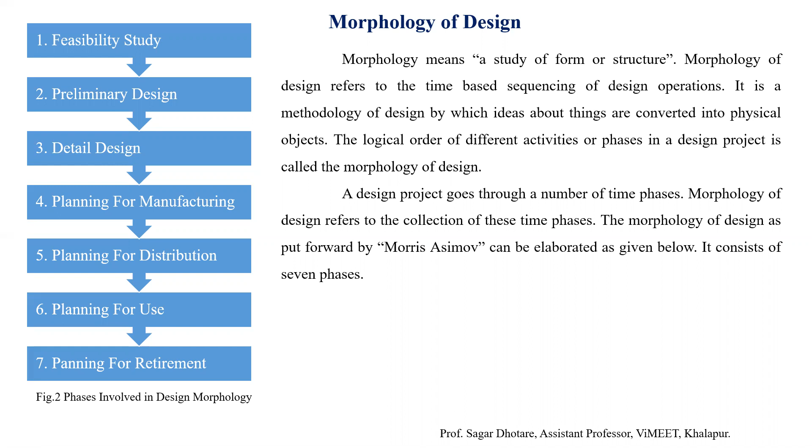We will elaborate one by one. First, feasibility study. This is a stage where whatever the design concept we are using should be judged for feasibility, or whatever concept or innovative idea we carry out, it should have a different solution.

We have to find out the various aspects of that product, then narrow down to the basic concept. In feasibility study there is a requirement of great creativity and innovation, and there are few uncertainties available as well.

We also consider this product or project from a business point of view. These are the various aspects. We also have to find out the evidences, so that it confirms whatever idea we are using is very solid and needs to go forward.

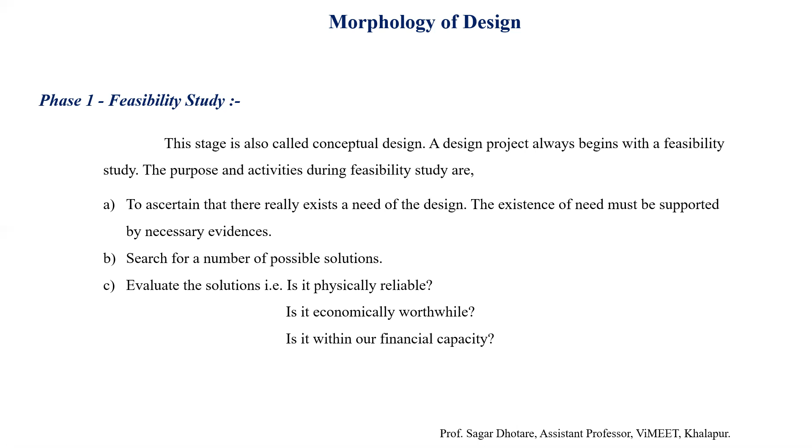Next, preliminary design. This is the stage at which the concept generated in the feasibility study is carefully developed. The structure of the design concept is developed in the engineering design phase. It is the place where flesh is placed on the skeleton of the design concept.

The embodiment of all main functions that must be performed by the product must be undertaken—we have to take down the list. It is in this design phase that things like strength, material selection, size, shape, and any special information are decided and noted, along with aesthetic looks.

Some important activities that must be done at this stage are model building and testing, studying the advantages and disadvantages of different solutions, and checking the performance, quality, strength, aesthetic looks, etc., so that the product could be ready in the preliminary stage, or embodiment stage, of design.

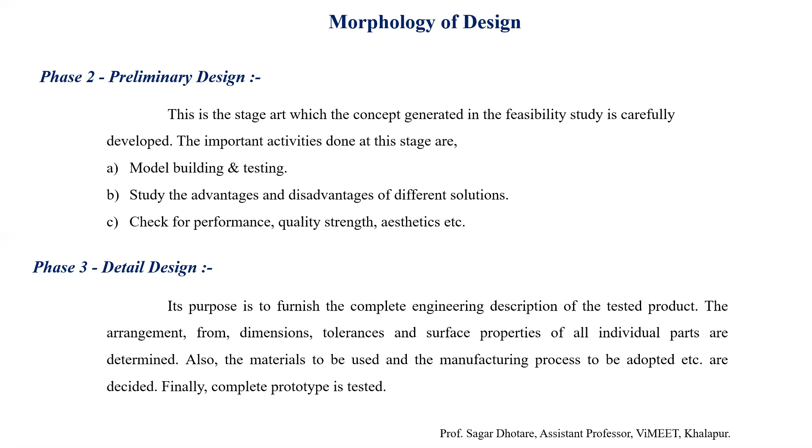Next, phase number 4. This includes all the production planning and control activities which are necessary for manufacturing of the product. So we can say stage 4 names itself planning for manufacturing. It gives the idea of what we are actually doing in this stage.

So detailed planning must be done to provide the production department so they can manufacture the component, product or part very easily. A method of manufacturing must be established for each component in the system. As usual, the first step is the process sheet is created for manufacturing any component. It contains the sequential list of manufacturing operations that must be performed on the component or any components.

Then second stage, we have to specify the condition of raw material. So raw material could be a steel bar or any bars, any kind of sheets, or any casting. So this raw material condition we have to identify or specify.

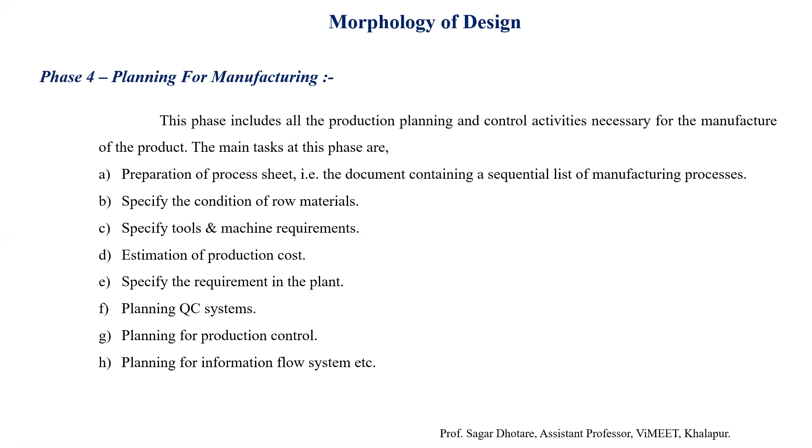Next, phase number 5: planning for distribution. This is again very important. If you plan properly and manufacture the product as per the given design, everything is done, but the economical success of any design depends on the skill exercised in marketing.

In this phase, for planning an effective distribution system, important technical and business decisions must be taken to provide effective distribution to the consumer of the product that has been produced. So we have to plan distribution with respect to technical and business considerations. In the strict realm of design, the shipping package may be critical.

The concept is such that the shelf life of the product may also be critical, and this needs to be addressed in the earlier stages of the design process, as I discussed before. Also, if any problem occurs with respect to the end customer, that should be tackled during testing and all processes, and converted or modified in the design itself, so that the end customer will be happy.

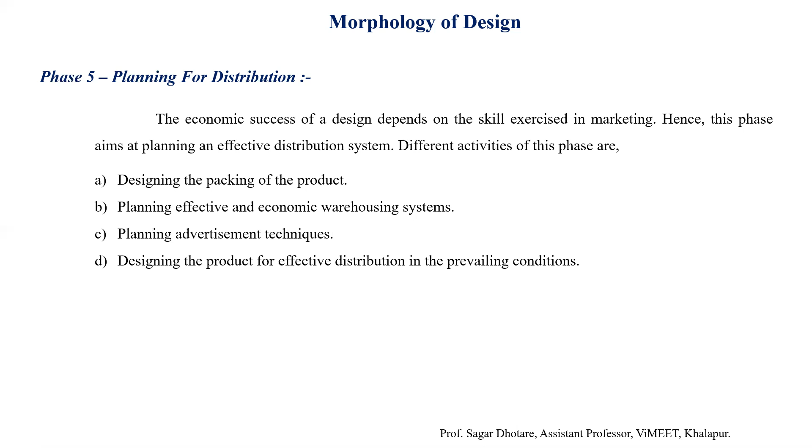Next, phase 6: planning for consumption or use. The purpose of this phase is to incorporate all necessary user-oriented features in the design. The use of the product by the consumer is all-important, and we must consider how the customer will react to the product at all steps of the design process.

The following specific topics can be identified as important user-oriented concerns in the design process: ease of maintenance, durability, reliability, product safety, convenience in use (the human factors we consider in engineering), aesthetic looks, and economy of operation.

Consumer-oriented issues must be considered in the design process itself at the very beginning. They must go through a thoughtful process at the beginning stage only, because afterward it is very difficult to cover up all these things.

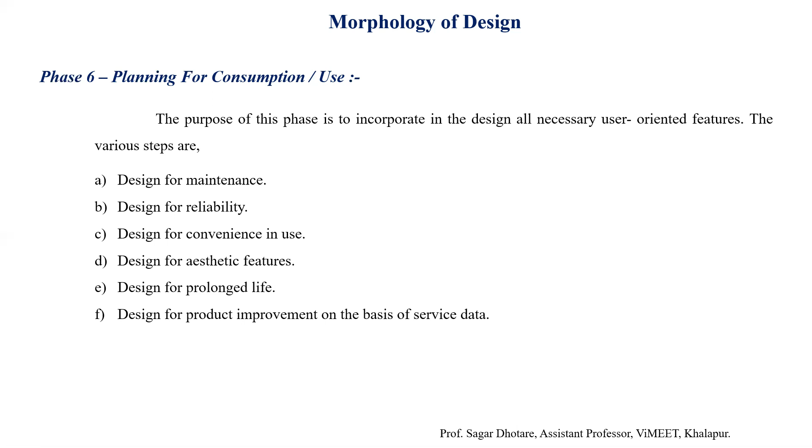The last stage is planning for retirement. This phase takes into account when the product has reached the end of its useful life. The final step in the design process is the disposal of the product. The useful life may be determined by actual deterioration and wear to the point where the design can no longer function, or it may be determined by technical obsolescence in which a competing design performs the product's functions either better or cheaper.

In consumer products, retirement may come about due to various changes in fashion or taste. So we always have to modify the design aspect, finding upgraded versions so that the customer's taste does not change away from the product.

The basic stages we perform in this phase are: design of several levels of use, design to reduce the rate of obsolescence, and examining service-terminated products to obtain useful information.

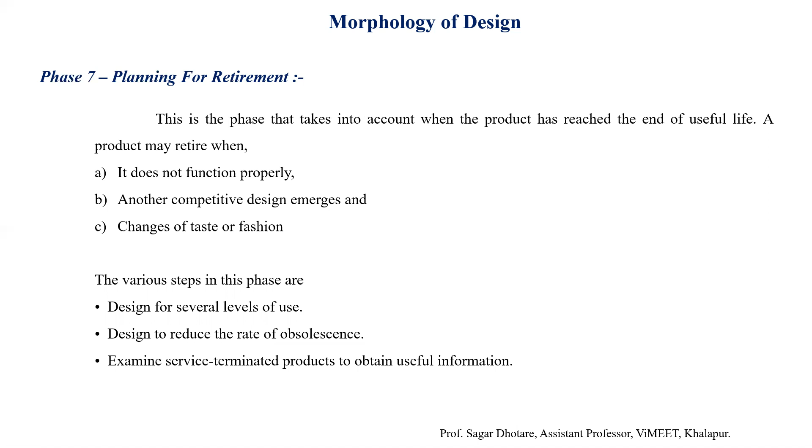Now the next design type is optimum design. In optimum design, there are a few design parameters which we have to classify. The first one is the functional parameter - these are the conditions imposed by the end application on the component, the requirements which must be fulfilled to perform the function of that component.

Generally, the function requirement parameters are independent of the material and geometry parameters.

Second one, material parameters. The material parameters describe the material values like density, modulus of elasticity, modulus of rigidity, yield strength, ultimate tensile strength, cost per kg, etc.

Third design parameter is the geometrical parameter. These are parameters which define the limit of the geometry of a mechanical component, such as module of gear, length of belt, face width, etc. It can define particular dimensions, basic tolerances, and so on. So these are a few design parameters considered in an optimum design.

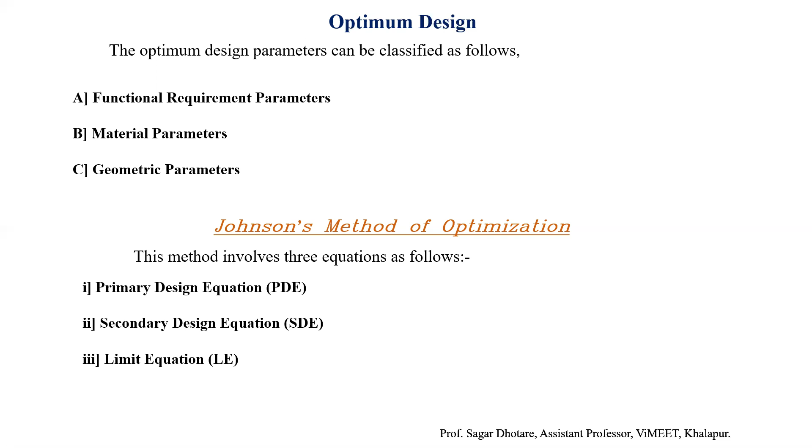Okay, so Johnson's method could give us the optimum design process, which follows 11 steps. We will discuss them one by one.

First step is to select the independent geometrical parameters. In this stage, we have to identify which are the independent parameters and which are the dependent parameters, and out of that we have to select the independent parameter.

Second, decide the basics of the optimum design. Here we have to decide which things need to be optimized, such as weight, cost, strength, etc.

Then we have to write the primary design equation. In stage four, we have to write the secondary design equation with the limit equation, so that whenever we get a solution, it could be the optimum one. Then we have to classify the parameters.

Next step, we have to combine the secondary design equation with the primary design equation, so that by using various optimum design methods, we can find out the most possible solution.